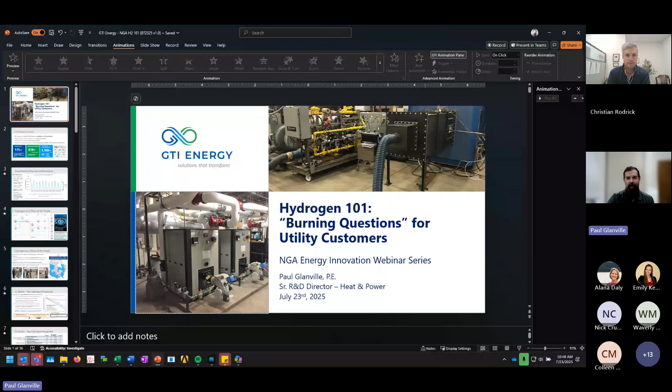Thank you. Looking forward to sharing some insights here. I'm going to go for a screen share, and we're going to get rolling. Thank you, everybody, for spending some time with us today here. As was just mentioned, I'd like to cover kind of burning questions, pardon the pun, for utility customers around the topic of hydrogen.

My name is Paul Glanville. I've been with GTI Energy for about 16 years now. I oversee what we call our Heat and Power division, which is our research concerning buildings and industrial customers. And for that reason, I'm going to focus on that customer set. The topic of hydrogen, particularly as Hydrogen 101, is a big topic, and we are happy to engage further on this as your interests expand here.

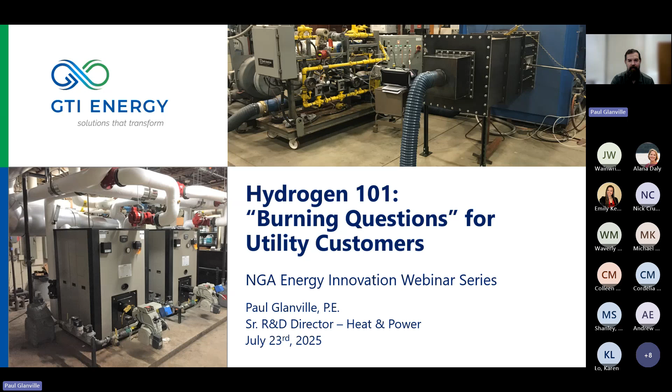So let's dive right in. First, a quick introduction to GTI Energy for those who aren't aware or know us well. We're an industry nonprofit based in the Chicago area. We do have remote offices and laboratories throughout the U.S. And we've had a long-standing relationship with the natural gas industry, both midstream and for utilities as well.

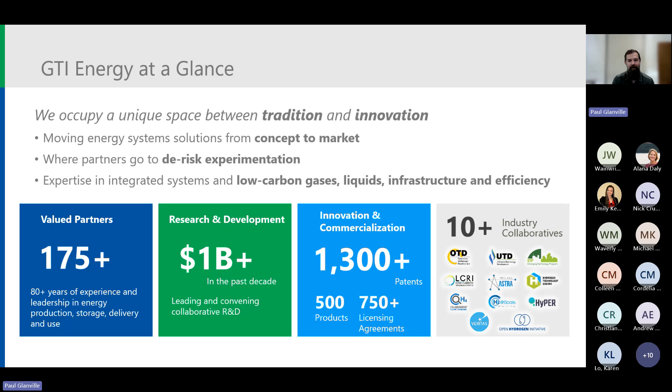As a nonprofit, our primary function is collaboration. What we look to do is work with our government and utility partners to de-risk and advance technologies that support the gas industry and the energy industry more broadly. One way we do that is through industry collaboratives, ways that we work with utilities as a group and also other folks in the industry space as well. Please feel free, I believe my contact information should be provided; if not, it'll be at the end of the slide. If you're curious to learn more about us and how we work with industry, don't hesitate to contact us.

So let's first start with why are we talking about hydrogen? This is a chart that shows the natural gas and electricity energy use for residential customers in Illinois, where I'm based at a state level. Natural gas on an energy basis is shown in blue, and electricity is shown in red. The main thing to highlight here, of course, there's some seasonality, as you would expect, between winter and summer, alternating peaks for both grids. But there's a significant difference in the energy delivered to Illinois residential customers from the gas grid relative to the electricity grid.

One challenge that we have broadly, not just in Illinois, is how do we decarbonize? How do we reduce the environmental impact while retaining the affordability and reliability of the gas grid? With this challenge in mind, where are there opportunities to have these grids support one another?

This is a big topic because the gas infrastructure is very large. In North America, it spans more than 5 million kilometers and serves more than 85 million buildings and facilities. The gas grid also delivers about 600 gigawatts of energy. To put that into perspective, the all-time peak of the California grid is on the order of 50 gigawatts, so you can get a sense of the scale of energy delivered by the gas grid at its peak.

And what it really is, is a form of storage. That number, 1.3 petawatt hours, is a gigantic number. It's a form of energy storage that far surpasses what we're able to store in terms of pumped hydro, batteries, and others. So it's significant storage there.

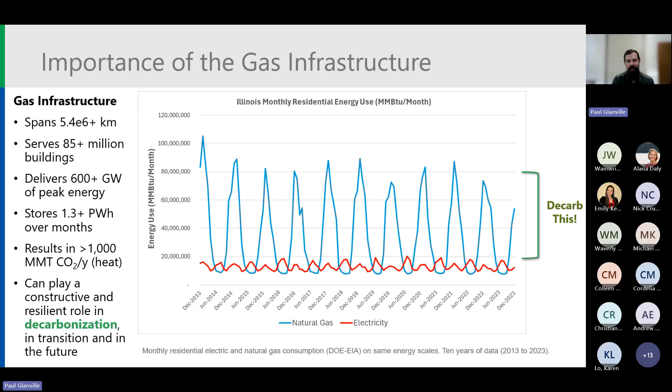Let's talk about how hydrogen can fit into that. This diagram shows a simplified view of what the energy system looks like today. You can see multiple forms of primary energy on the left-hand side, everything ranging from traditional fossil fuels to nuclear energy, biomass, solar, and other renewables.

Those energy sources can be converted or transported as is. The primary conversion is towards electricity, where most of those energy sources are used to create power for the power grid. How those energies are distributed or moved through infrastructure can vary, and how they're stored as well can vary. They ultimately serve what we call end use - buildings, transportation, and industrial - all the customers served by utilities today.

Now, how would this energy system look if we were to aim towards a net zero emissions world? It will certainly start to look a lot more complicated. And believe it or not, this is a simplified vision of how this could look in the future.

The main thing you see here is a lot more happening in the 'make' piece, where sources of primary energy, renewable or others, are not only converted to electricity, but also to biofuels, hydrogen, ammonia, synthetic fuels, and even capturing CO2 at the point of use or via direct air capture can play a role as well. These ultimately serve all of the end uses.

So today we're going to focus on hydrogen, the pink shaded area here. This is what that looks like, where not only can biomass, waste heat, waste energy, or electricity produce hydrogen, but so can natural gas.

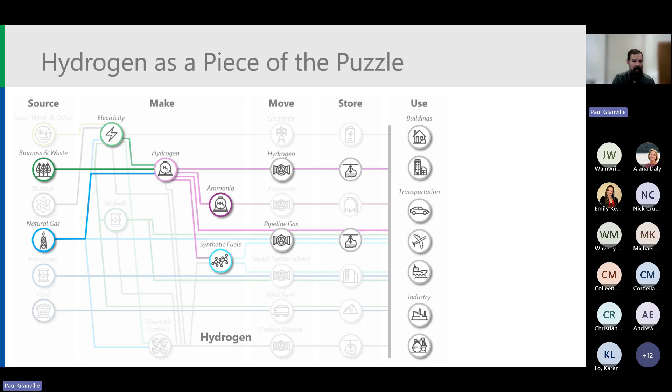And we're going to focus broadly on the topic of blending into the pipeline gas. Now, you might be curious - for all of these diagrams and how things are oriented, how does this play out in terms of the actual emissions reduced, and what might all of this cost?

While we won't cover that here, I'd invite folks to take a look at a recent study we put out. It's publicly available with the link there, where in partnership with the Electric Power Research Institute, we've explored modeling at an economy-wide level how these pathways might play out in different scenarios to get to net zero by 2050, and even compared them to other studies coming from university groups like Princeton and other entities as well.

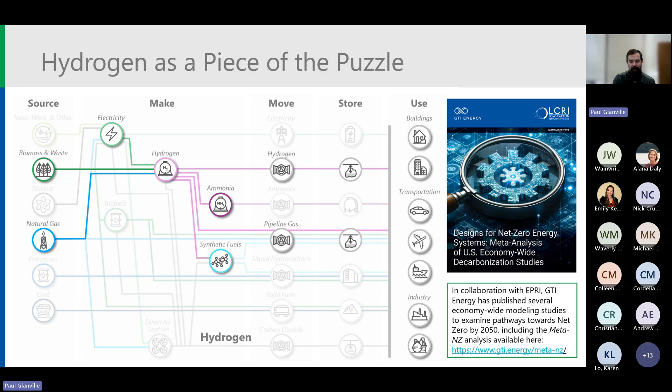So an interesting way to look at some of that, but we won't cover that here today.

Another way that we know hydrogen is a piece of the puzzle is that the utility industry is beginning to look at it directly. We're already looking at ways to reduce the environmental impact for utility customers by looking at renewable or low carbon hydrocarbons. Oftentimes that takes the form of biomethane or renewable natural gas, but there's also renewable LPG, biodiesel, et cetera, ways we can reduce the impact of how traditional fossil fuels are used today. From a researcher standpoint, these are basically drop-in fuels, so we don't spend a lot of time examining impacts on end users, but there's some work around trace contaminant impacts.

Now, hydrogen is a bit of a different story. You can see on this map a chart where the American Gas Association tracks how many states and provinces have active hydrogen blending initiatives, in many cases involving customers. The main point is that most parts of North America are actively looking at hydrogen as an energy decarbonization vector, and in many cases there are multiple pilots per province or state. In some cases, these involve up to 10,000 utility customers. So this is moving quite rapidly.

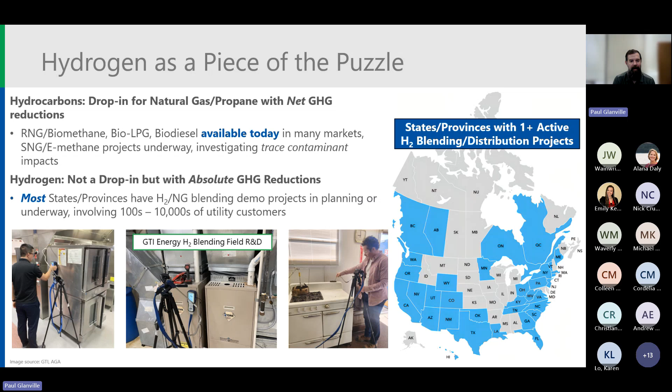Some of these field research efforts, you can see some photos here where my colleagues at GTI Energy are working with utilities performing these blending demonstrations, looking at how their customers might be impacted by blending hydrogen into their gas grids today.

Okay, so now we're going to cover some of the basics here about hydrogen as compared to natural gas. We'll sometimes refer to natural gas as methane. Generally speaking, methane is the major constituent of natural gas, up to 90 to 92%, in some cases even more.

Hydrogen has very different properties from natural gas. Some of these properties may be familiar. You may already know it's a smaller molecule, it has a lower volumetric density, it's more reactive, it's more readily ignited, it can have a higher flame temperature, and it can be more flammable.

But of course, you also might know there is no carbon or carbon dioxide emitted when you use hydrogen, whether through a fuel cell or in a combustion process. Because hydrogen converts fully to water vapor, the exhaust of a combustion process might be more humid. You might also know that a hydrogen flame is a lot less visible - not invisible, but a lot less visible than a natural gas flame.

These all have impacts on how combustion processes and other processes are controlled today, and we're going to talk a lot about combustion terms today. I want to highlight how there are different flame types, organized by how much fuel and air are mixed together prior to ignition.

Going from non-premixed, where there's no fuel and air mixed prior to ignition - think like a candle flame - to partially premixed, where some of the air needed to fully combust is mixed with the fuel before ignition, but not all, and then fully premixed, which is a lambda value greater than 1.

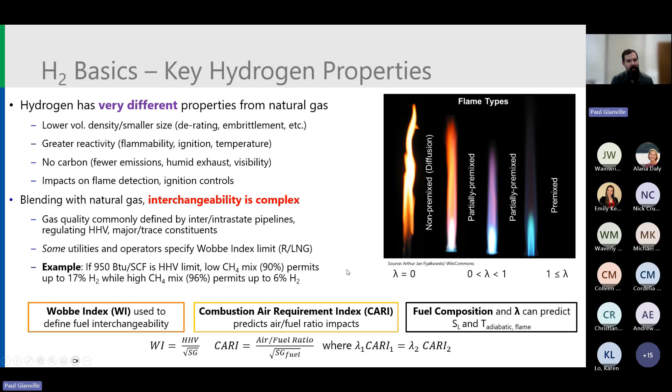Now we want to talk about interchangeability, and I'll cover this chart as well, where a lot of these important properties we're very familiar with, things like the higher heating value and the Wobbe index, change as you blend hydrogen into natural gas. We can predict some of how equipment and customers might be impacted based on this, but this doesn't tell us the full story. So while we will talk quite a bit about the Wobbe index and things like the combustion air requirement index, the fuel composition can tell you what might happen, but it doesn't tell the full story.

The chart here on the right-hand side shows how some of these key properties change as you add hydrogen into a methane blend, substituted as natural gas. Just to use as a marker, some of these trends are linear, some are non-linear. So just to use 30% as a blend ratio, which you'll hear quite a bit in today's talk.

A hydrogen natural gas blend is about 26% less dense than natural gas. It has about a fifth of the reduced heating value on a higher heating value basis, but it only has about 7% reduced Wobbe index. That's going to be an important thing we'll come back to later. It requires 23% less combustion air, and overall hydrogen requires a quarter of the combustion air to fully combust relative to natural gas. That's another important trend we'll come back to.

And it also does not result in a 30% reduction in CO2 emissions, but rather a 12% reduction. This purple line here is nonlinear because of the reduction in energy density. We need to burn more blended fuel to meet the same heating demand or same temperature target, and that means it's not a 1-for-1 for CO2 reduction.

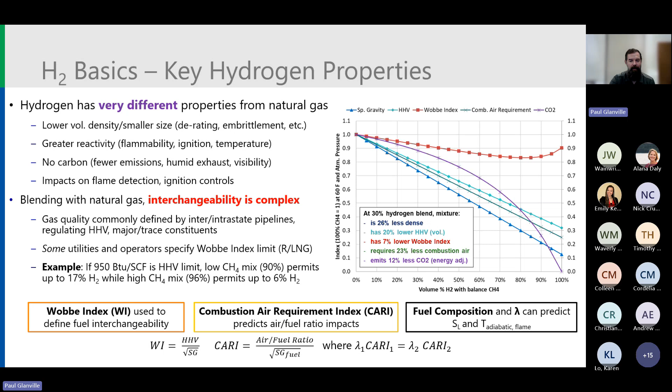It's 30% to 12%. So I put up this table of properties here for technical audiences. I won't go through what all of these mean here. If you're somebody who is in the combustion field, a lot of these terms are going to be familiar, but I am going to group them in terms of what the important impacts are.

So for the first set of metrics here, we're comparing the impact of methane, a 30% hydrogen methane blend, and hydrogen. Things like the molecular weight, the weight of the molecule itself, the density of the fuel, the heating value, and the Wobbe index - these are very important for interchangeability, but just to reiterate, the CO2 factor is nonlinear. So a 30% blend results in maybe a 12% reduction in CO2.

When we're talking about the air to fuel ratio and the flame temperature, it's worth noting that the flame temperature is hotter, the air to fuel ratio is lower, but these can impact each other, meaning that if the air to fuel ratio has more air, as you add hydrogen that can cool off the flame and mitigate this flame temperature issue. So it's important to look at these properties together, but not in isolation.

Now let's talk about things like the flammability limit, ignition energy, and detonation cell size. These are very important when you're designing for safety within the equipment and also within the facility as well. While methane and hydrogen have a similar lower flammability limit, there's a big difference in the upper flammability limit, meaning a small amount of air mixed with hydrogen is ignitable in a way that is not the case for methane. This is very important when thinking about purging air out of systems. We have to be more careful about that with hydrogen relative to natural gas.

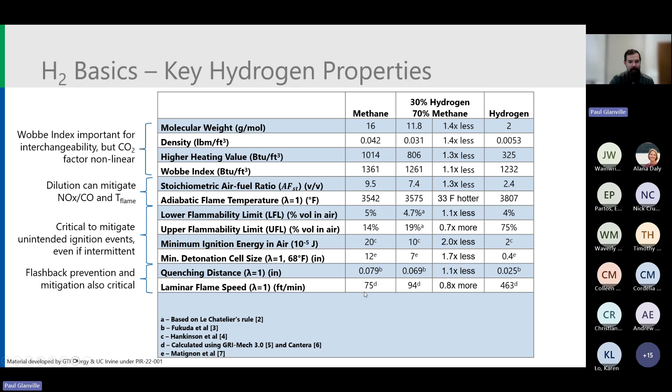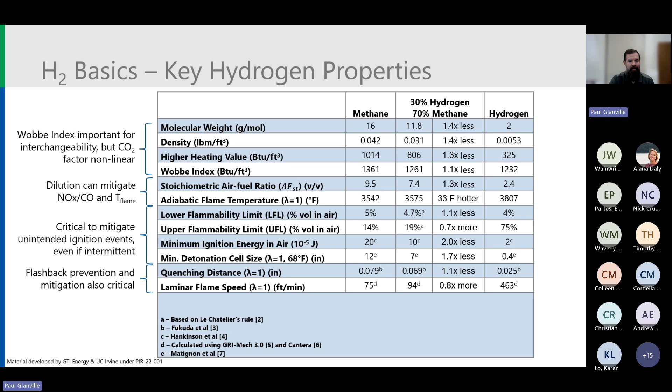One thing that folks may also know is that hydrogen burns faster than natural gas, and that's really pointing to this laminar flame speed here. You can see it's up by about a factor of 6. So as we increase the flame speed, the flame wants to move closer towards where it's being injected into a process. That increase, or that flashback, can create an unsafe condition, and it's further made difficult by this quenching distance, meaning the hydrogen flame can get closer to a wall and still sustain in a way that has this sort of curvature that moves back towards it. So we'll talk a lot about the topic of flashback as we go forward here.

Now, some of these properties are interesting to chart here. I won't spend a whole lot of time on this, but just to drive home a few points. One of the main points here is that the air to fuel ratio of a combustion process really matters. Most appliances and industrial equipment out there do not directly control air to fuel ratio as the fuel changes.

What does that mean? That means that if you took a cooking appliance, or a commercial boiler, and you operated it with natural gas, and then operated it with a hydrogen blend, because of the reduced amount of air needed for hydrogen to combust, and the fact that that air will still be there, we will have what we call in the combustion field a shift leaner, meaning this value for lambda will go up.

While we might be worried about the flue gas becoming more prone to condensing, which is an increasing dew point, we also have to think about shifting, because we're moving the air to fuel ratio at the same time. The same applies for adiabatic flame temperature. While the flame temperature does go up for a constant air to fuel ratio, the air to fuel ratio is also changing. And so as it changes, it's possible for a flame to get cooler as we add hydrogen for this reason.

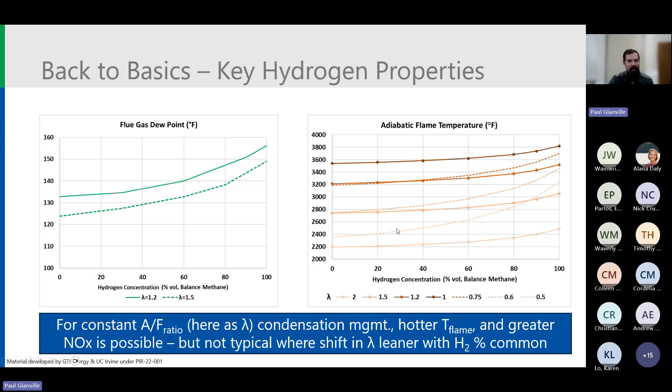It's a little complex, but the main thing is that we have to think about these properties together, not in isolation. Another thing to think about here is flame stability.

The laminar flame speed increases for hydrogen relative to natural gas. I mainly want to point out, as we look at flame speed as a function of air to fuel ratio for different hydrogen fractions, that these lines are very close to each other until we get to about 75% or 100% hydrogen. That means that while this flashback and stability issue is very important for us to pay attention to, it's really mainly a thing we have to worry about when we get to much, much higher blends.

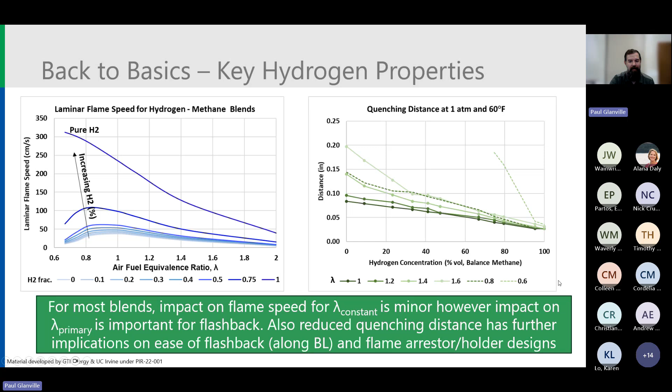And this is also a factor for quenching distance as well, for the same reasons. Now, I also want to drive home the point that the type of burner matters, and there are lots of different types of burners out there.

A different kind of burner is a premixed burner. This is where we are intentionally mixing fuel and air at a specific ratio, typically with a blower and some form of mixer, pushing that under pressure into a burner in a combustion chamber where there's something like a flame holder - usually a screen, perforated plate, metal mesh, woven fiber, even metallic foam. These can adjust their air to fuel ratio, but typically that's done through a pneumatic signal.

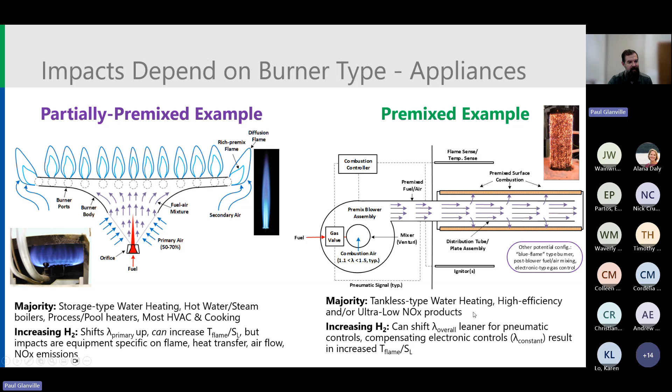That means we need to think about these a little differently. They will shift leaner as well, unless they are actively controlling for the change in fuel, which is less common in the US. It's quite common, or more common I should say, in Europe. This applies to high efficiency things like tankless water heaters, ultra low emission appliances, and things like that. We won't cover so much about industrial processes here, but this is an area where we're also focusing on hydrogen blend impacts.

We do have a third type of burner that we don't typically see in residential and commercial buildings, called a diffusion or non-premix flame. This goes back to that candle example, where the fuel and air meet at the flame itself. This is very common for atmospheric heaters, industrial furnaces - think the metals industry, for example. Here we need to think about how adding hydrogen, while it doesn't change the stability as much since these tend to be very stable flames, the flame itself will become smaller because of that shift in flame speed.

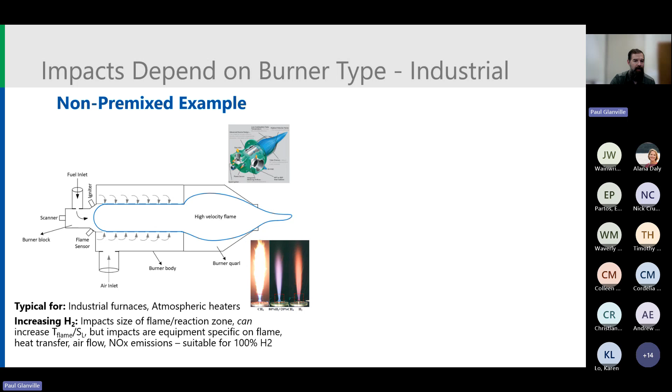And that can impact process temperature, something we need to pay attention to. This is also quite suitable for 100% hydrogen, where a little bit more care is necessary to convert a partial premix or a full premix burner to 100% hydrogen.

There are partial premix burners used in industry as well. These are typically for dryers, process ovens, and even as a means of controlling emissions like NOx. We have to think just like we do about the other premix systems, so there are some similar trends there. Main point, if you take away anything from these diagrams, is that the type of burner matters in terms of how hydrogen will impact these equipment and appliances.

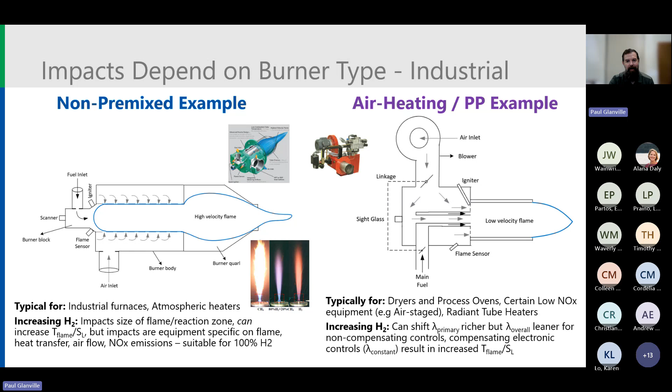I'll quickly go, not in the interest of time, I won't spend a lot of time on this slide here, but just say that we also need to think differently about engines, turbines, and fuel cells. While these are certainly less common than the appliances and industrial equipment we were talking about before, maybe with the exception of backup generators, this is an area where we are actively looking at these impacts as well. I would be happy maybe in a later conversation to dive into this topic, but just say that this is an active area of development.

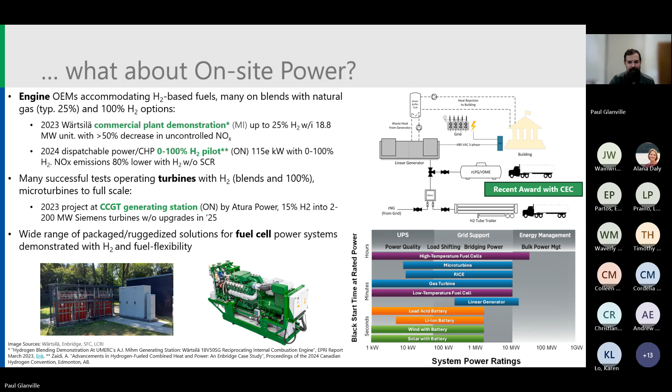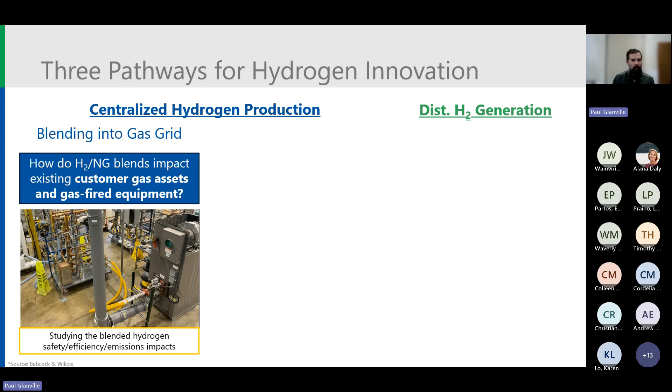When we think about our hydrogen-focused research at GTI Energy as it relates to utility customers, we kind of put it into three buckets, and our research questions depend on those buckets. The first one follows from what we're going to focus on today: what happens when everything out there that's designed and certified for natural gas that the customer owns is impacted by blending hydrogen, and how does the blend of hydrogen impact that? Does 10% matter more than 20%, et cetera?

Another topic is, what does it mean to convert the infrastructure and the end users to be able to accommodate 100% hydrogen? I can say definitively that there are relatively few, if any, systems out there today that are designed for natural gas that would accept 100% hydrogen. The fuel is too different, it's something that you would need to retrofit for. And there is research that we have ongoing looking at that.

These are both envisioning a future where hydrogen is produced centrally and either blended into the gas grid or distributed through a separate grid overall. These are both things that are moving quite fast in Europe, as I'm sure some of you are aware.

The last topic is hydrogen microgrids. If you produce hydrogen and store it close to the end use, the customer should be prepared for wider swings in the hydrogen blending, as the demand shape will determine what the blend ratio could be in some scenarios. For this, we have hydrogen microgrids that we are operating. We have end-use equipment that we are working to develop full fuel flexibility, meaning they're able, through controls and design, to operate at 0 to 100% and cover the full range. I mentioned before that that's not something you would do with something designed for natural gas, but it is possible.

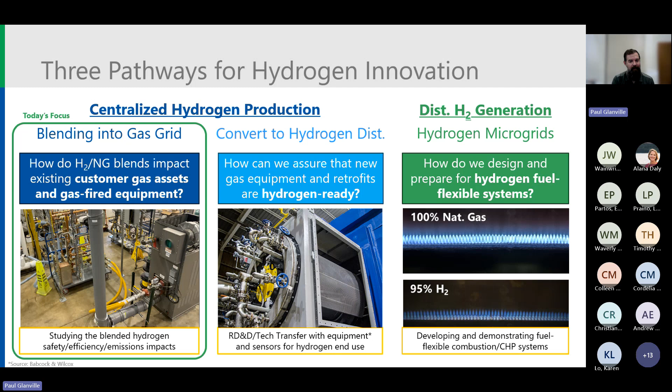But those are the three areas here. Today, we're going to focus on the first category, which is actually the biggest category of our activities with our utility partners: what are the impacts of blending into the gas grid? And I'm actually going to speed up here. The main goal is to introduce some key concepts, try to give you a sense of where the research is right now, what the key findings are, and would invite through the Q&A and maybe subsequent engagement on diving into the details. So just forgive me in advance, I am going to speed up here a little bit.

So the first key concept is that the gas industry has a legacy of operating gas grids that have hydrogen-rich blends. Many folks might be aware that Hawaii Gas, operating in Oahu, has about 30,000 customers that, going back to 1970, have used mainland equipment with mainland operating procedures and delivered up to a 15% hydrogen blend. In Hawaii, they gasify naphtha through a refining process, and that syngas, which is not natural gas but has some hydrogen in it, is blended and delivered to those end users.

Not a lot of issues there as far as we know, but there are larger networks of more hydrogen-rich gases, particularly in Hong Kong and Singapore. The video here shows an appliance in Singapore operating on a 65% hydrogen mixture. These appliances are certified for this town gas, so this is something that's still happening today.

However, if you went back to the World War II period and before, an area we've studied, this was common throughout the US. Even here in Chicago, we had multiple manufactured gas grids where inputs like coal, petroleum, and other fuels were gasified, and these hydrogen-rich gases, with some of the properties shown in this table, were delivered for long periods for lighting, heating, and industrial processes. The conversion from the manufactured gas network occurred from about the 1930s to the 1950s in the US and Canada, and it's something we should, as an industry, return to understand how that conversion happened.

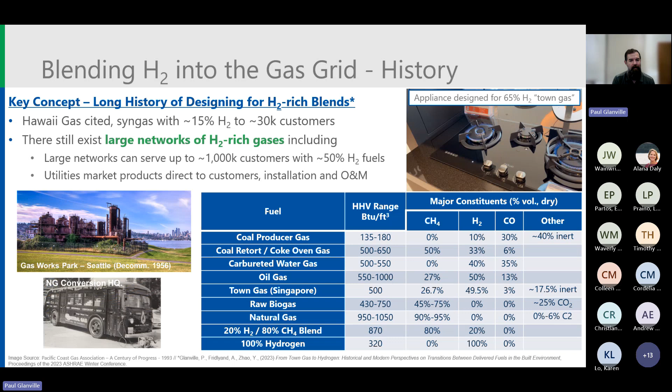In some cases, like here in the Chicago area, there was a gradual blending process where natural gas was gradually blended into the manufactured gas grid to gradually convert the customers. In other parts, later on in the 40s and 50s, in places like Washington, D.C. and New York City, the conversion was node by node, one day manufactured gas, the next day natural gas. Depending on how this hydrogen economy evolves, utilities may take different approaches here.

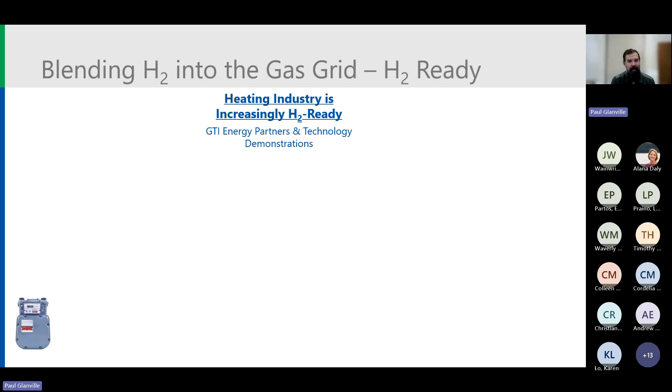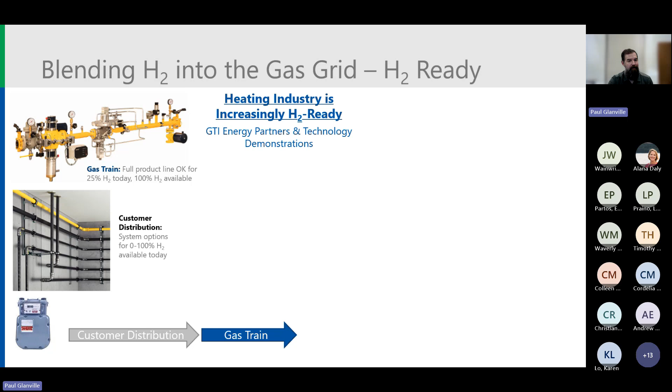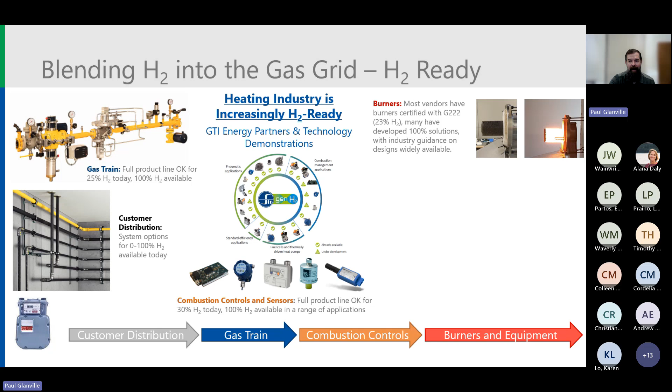Another thing I want to highlight: in addition to there being a legacy and current effort to design appliances for hydrogen blends, the heating equipment industry has really responded to this topic broadly. Today, for residential, commercial, and industrial customers, there are solutions now available, in some cases certified, to operate with a hydrogen blend or 100% hydrogen for customer distribution, for the gas train leading up to a heating appliance or heating equipment, for the controls within the boiler or other process in terms of ignition controls, flame supervision, and for burners themselves and equipment as well. This is an area that's moving quite fast.

I want to cover a key topic here: the interchangeability of fuels. As we think about blending into the gas grid, we have to think about tariffs where things like the higher heating value and the Wobbe index are defined. On the chart here, I'm using SoCalGas and TC Energy, a distributor in Canada, as two examples. You can see how, given their straight-line min and max allowable tariffs, blending hydrogen into different reference gases might impact those areas.

This is something we have to pay attention to because natural gas is a mixture, and how it is mixed and what Wobbe index it has can limit how much hydrogen is blended if we use these limits. The last thing I'll highlight is that there are burner interchangeability indices as well. While the Wobbe index is the most common index used today to express how different customers could use different fuels with the same Wobbe index, there are burner interchangeability indices used today too. Some of these estimate the impact on burners of flame lifting, flashback, yellow tipping, and other phenomena. These are not widely used, but using the SoCalGas example, they do have limits in their injection tariff for these properties as well.

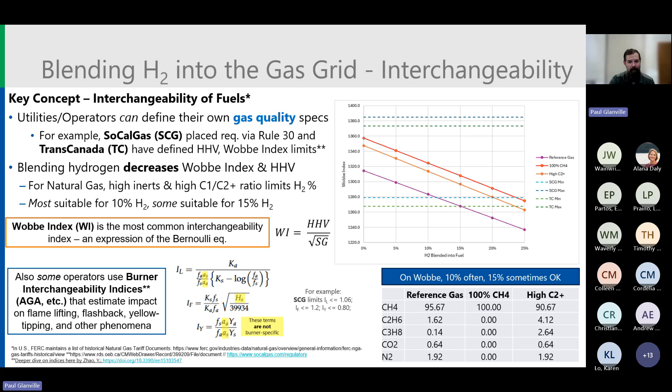So these are things that were originally developed for the conversion from the manufactured gas era, and will need to be broadly updated, as some of our research is moving towards, as other fuels are blended into the gas grid.

So I quickly want to, and I can see that I'm going a little bit, I'm not going fast enough. Let's put it that way. I want to go into some themes from the research here.

When we are testing equipment designed and certified for natural gas, what are the outcomes? What are the big themes? We've tested maybe more than 90 pieces of equipment so far for industrial, residential, and commercial customers, trying to answer some very basic questions. Does it cause the equipment to malfunction? Does it lead to unsafe temperatures? Does it adversely impact the efficiency?

Does it increase NOx or carbon monoxide emissions? Does it increase leakage within the facility? And does it reduce the heat output?

We did publish a 2024 meta-study looking across our research and also research from other groups, like universities and other entities, 30 or more studies, to look at the trends in terms of flame stability and so forth. We're trying to work with our research partners and peers to aggregate these topics to provide information to the industry.

In the interest of time, I do have more slides that go into detail on these topics, but I also want to open it up for questions and answers. I'll keep these slides here and pull them up in the discussion, and leave them for your reference. I'll pause here for questions.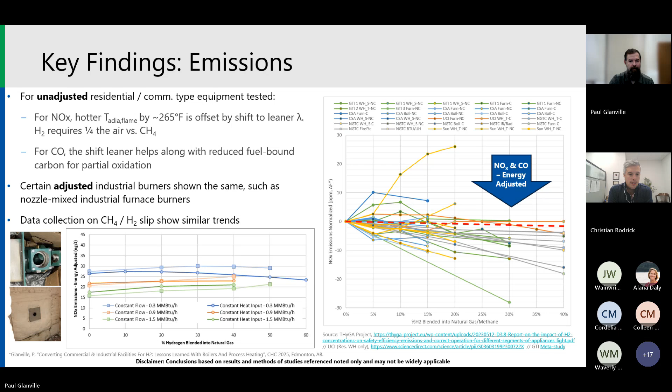Okay, great. Now I'm going to ask you to go out on a limb, and maybe you're not comfortable doing that, but I want you to predict the future a little bit. If the systems we have today aren't ready for 100% but we think they're in many cases ready for 30% or perhaps more, where do you see this landing, if not in the near term, in the foreseeable future? Do we get to 100%? Not on the microgrid scale, because I know you addressed that as well, but at the large scale, what do you see as the future for this?

Great question. So GTI Energy, and maybe some of the attendees are as well, we're involved in efforts with UL and the CSA group to address this question from a standards point of view. But just from the research point of view, we do view 30% as sort of an upper limit for blending natural gas, and I'll try to explain why.

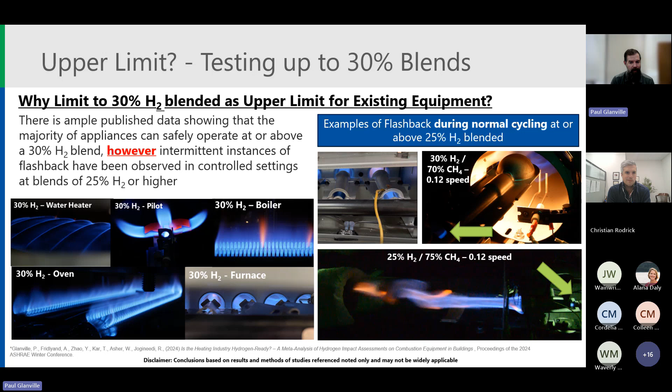It's really for two reasons. The first is that while lots of equipment have shown stability at appliances operated up to 60-70%, that tends to be where we start to see stability issues. We have, and others have seen, flashback instances. These videos show that at 30% or 25%, a furnace burner or dryer burner will have a flashback condition where the flame sucks back and anchors on the orifice in an unsafe way. We've seen it with furnaces as well. This is highly intermittent, which is a fancy way of saying random, and it's yet unexplained. This really starts to occur around the 25 to 30% range.

The other reason for limiting to 30% is a little bit more fundamental and has nothing to do with the appliances. A lot of buildings, including some of our labs, were designed for hazards brought on by natural gas and fuels like natural gas. So whether a leak of natural gas would ignite by an electrical spark from lighting, from a fan motor, from things like that - most buildings that utilities are serving today have this lower hazard classification. For a facility to operate, and the shift tends to be at about 30% hydrogen, to have a Class 1 Division 2 hazard classification from the National Electric Code, you need different lights, different motors, different ways to manage the electrical risk. From our standpoint, we've addressed this by creating ventilated enclosures, so buildings within buildings, so we can operate equipment above 30% hydrogen blended in a building that isn't otherwise set up for that hazard classification. So while the end use equipment might operate safely above a 30% blend, the electrical code for most buildings does have this additional limit to consider.

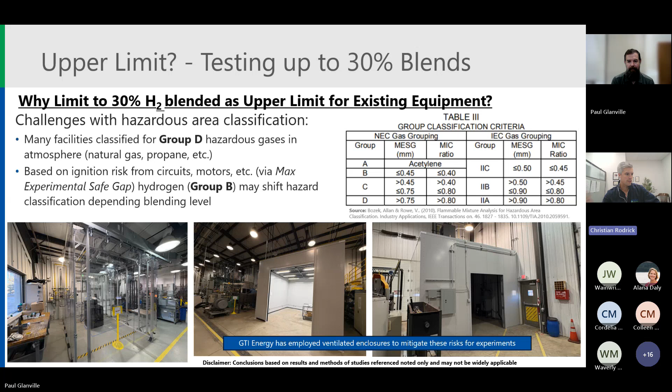That makes sense. I'll ask one more question that I just received before we let you get back to your day job. What about over the next 5 to 10 years? What do you see happening in this space, and where can this go in the near term?

From a technology standpoint, from a research finding standpoint, we hope we're close to answering most of the questions that would permit natural gas utilities to blend anywhere from 5 to 25 or 30%, if their regulators and the codes and standards authorities would permit that. There's an increasing body of evidence for that. I will say that is a significant amount of hydrogen. Just as one thought experiment, we looked at how much hydrogen would be necessary to get up to a 20% volume mix in just SoCalGas's network, just Southern California. That amount of hydrogen to meet that ratio exceeds the total US demand of hydrogen right now overall. So that's one way of saying the supply is going to become limiting for that as well.

Where we are seeing a lot of interest and activity is around industrial clusters and hydrogen microgrids. Hydrogen, in some cases, is easier and could be less costly to store as an energy carrier for a long period of time relative to batteries or other forms of energy storage. We have projects right now involving the US Army and other entities to explore this topic. So I think in the near term, the early adopters of hydrogen are going to be industrial clusters and microgrids, where the ability to be off grid for longer periods of time is a strong driver.